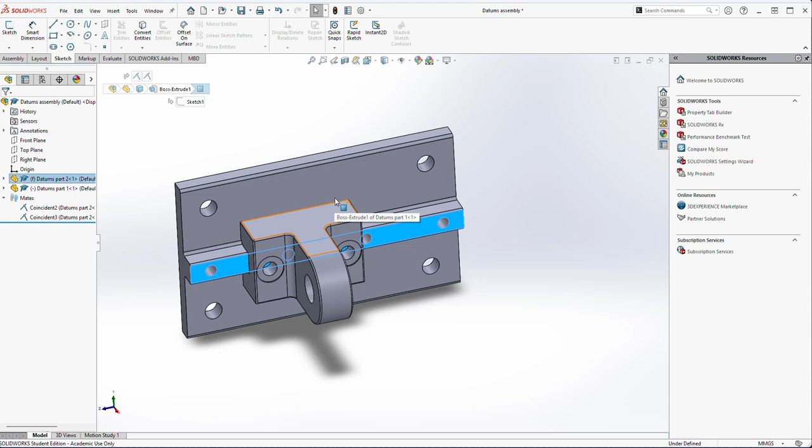If we have a look at the way it sits in an assembly, it mounts on a tongue on this plate, and it's got three positions that it can sit in where the holes line up - there, there, or there.

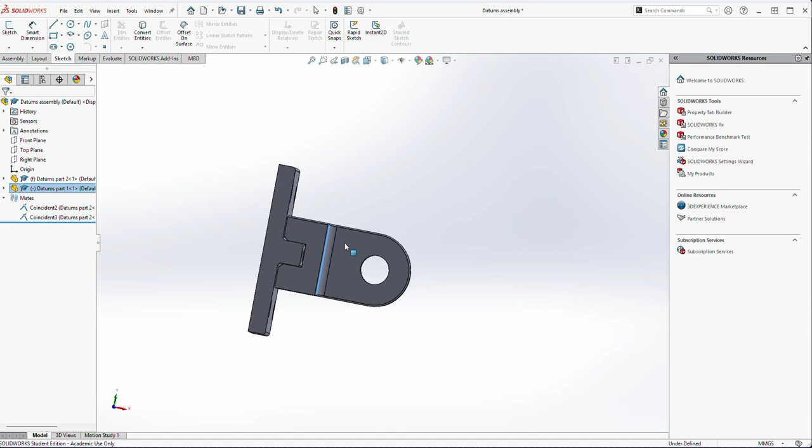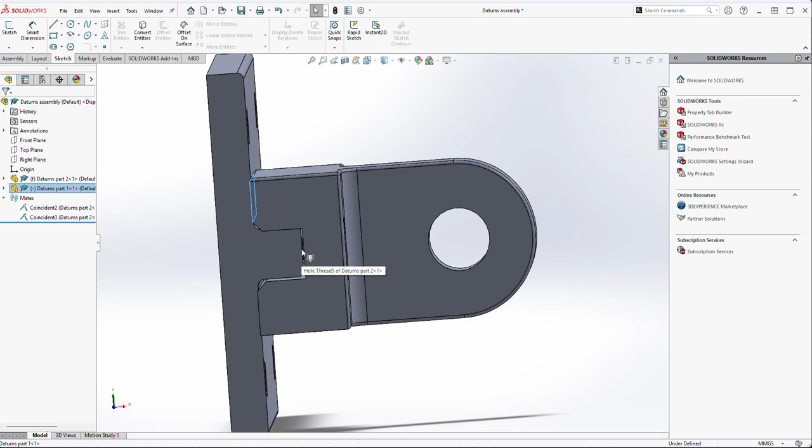If we look at it end on, there's clearance on top of the tongue and the base sits on the plate - I'll just shuffle that along a little bit. You can see that surface there is bearing on the surface of the plate. So when we design this, we don't want any interference here. There must be clearance, it must slide, and it must locate on these mounting points.

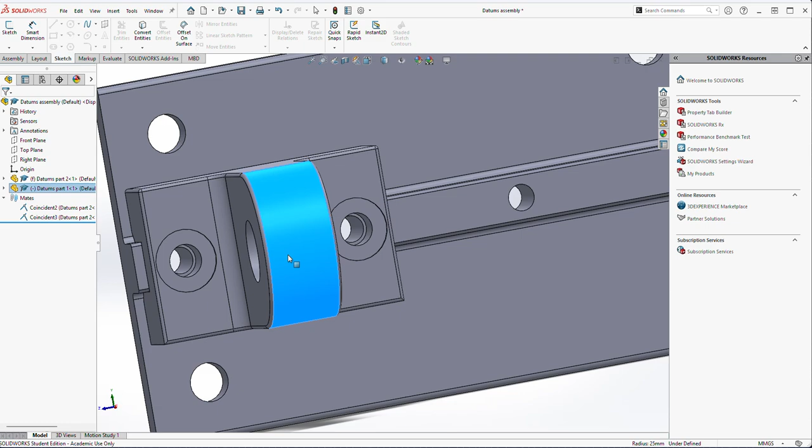The bolt must fit through the clearance hole here, and these are threaded, although they don't look like it, but they are. Whatever mounts on here will have a pin to run through this hole, and that should be probably some sort of sliding fit. So knowing the context of the thing, we can apply some sizes and indicate perhaps some machining tolerances that make the part useful.

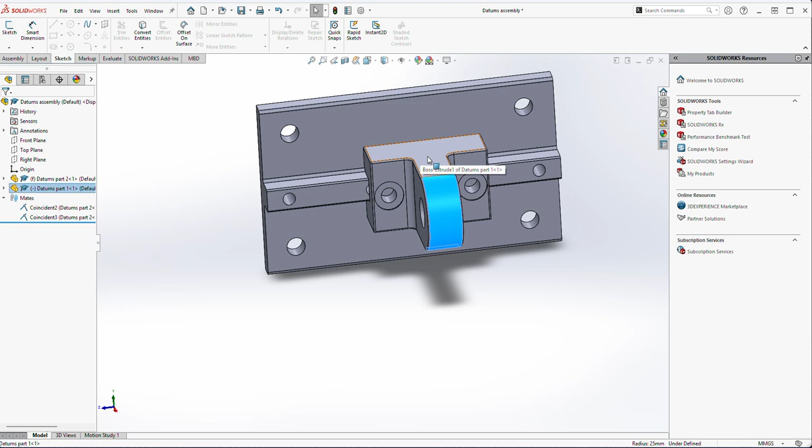The top surface doesn't matter, so a rough overall limit of plus or minus 0.5 would probably be sufficient. It might even be that the bar stock comes this width, whatever this happens to be - we'll find out, possibly not. The key really is not to make the part more expensive than it needs to be, but it must work.

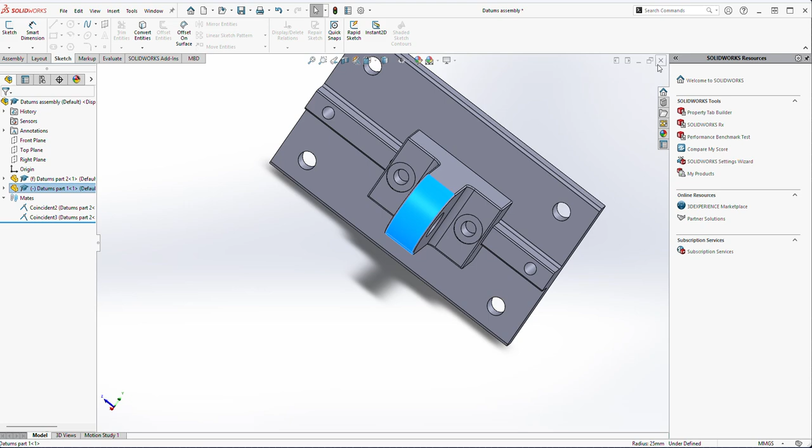So if we close that out and make a drawing from part - I've got a template that I've set up for myself here, which has a few little features we might just run over first. I've put the third angle projection symbol in there as part of the template, and you would do this, or have this done for you, in any business environment, and chances are there would actually be a company logo and company name on the sheet as well.

The other modifications I've made to the title block - there's a bunch of other angular tolerances and so forth I've gotten rid of out of here because they could be added if required. Often just sufficient would be lengths, and I've taken the automatic labels out of here. They're useful if we save our files in a particular way by drawing number, but if we're not doing that, you will have seen on your own initial drawings that this can get a bit messy.

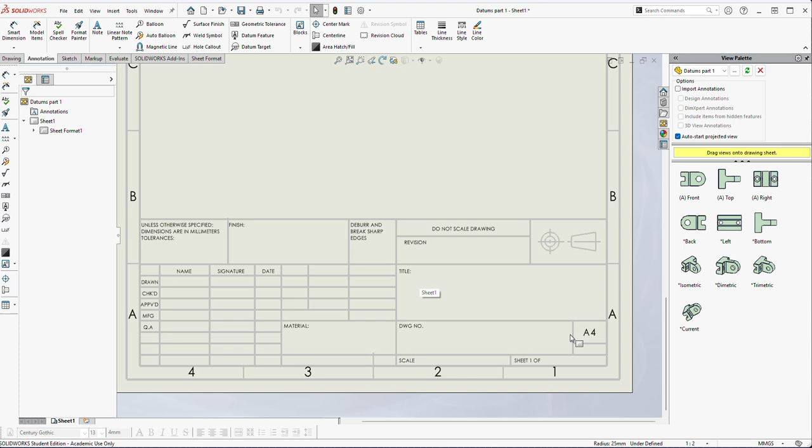I've changed it to sheet 1 of something - we can add a number in there if necessary. What else? That's about it really, but it just makes it a little bit more usable and a little bit less work each time.

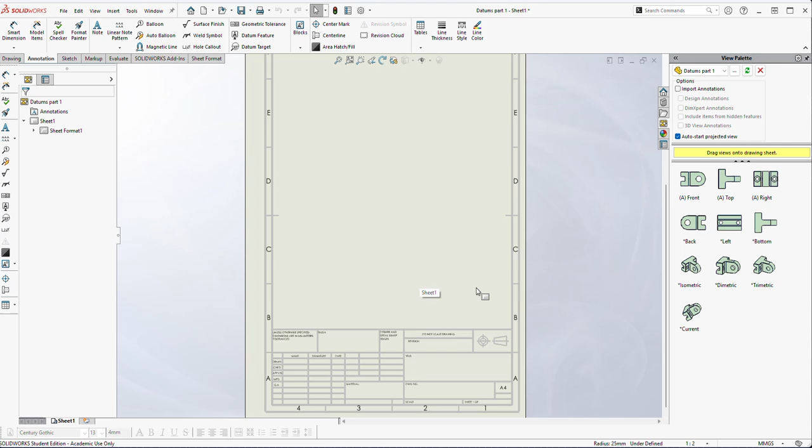I've had a query about this third angle projection symbol, and I think rather than putting it as an item that you can add, it should be always present, because we are always going to be drawing an orthographic drawing in third angle. I guess if this was purely a pictorial drawing, that would have to go, but most of the time we're not working off pictorial drawings.

So if we pick the front view and place that, it'll automatically project our three views. In this case, the part requires three views to show what it is. I don't think we need a fourth view other than our standard sort of pictorial that we tend to have on these drawings, because it's easy to do.

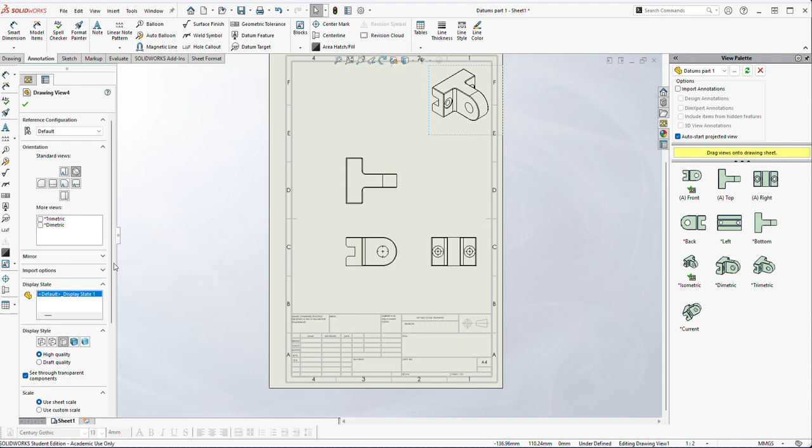Make that more solid, and that's fine sitting up there, and it leaves us sufficient room. I just might move these around a little bit, make use of the space that's available to us. Might have to shuffle these later on once there's some dimensions in place.

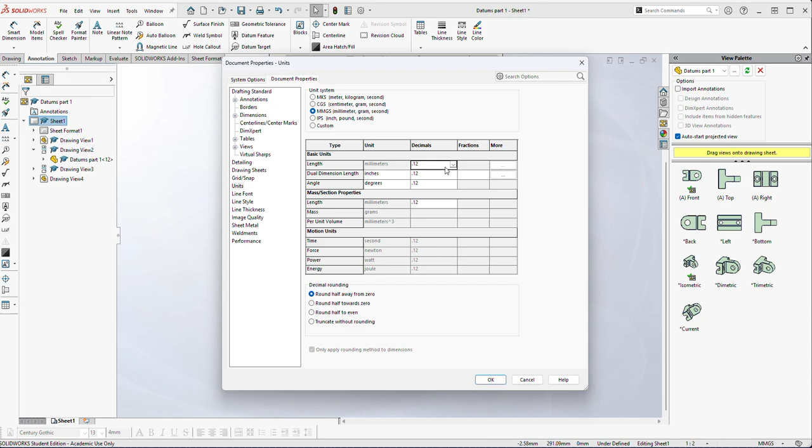So what I'm going to do initially is set the way that SolidWorks displays the dimensions to having no decimal places, because that will be quicker given that there's quite a few dimensions on this that don't matter too much. So if I just go into my tools and options - there's a few places to get to this - document properties, units, and we'll drop that down to none.

That means that for the overall general sizes we won't have to adjust them. We will have to adjust the initial dimensions we put on, because those are the ones we deem to be important. So focusing in on where there's two critical areas in this part - it's possible that the distance from the centre of this bore to the surface is important, and if it was, we would use that face as a datum.

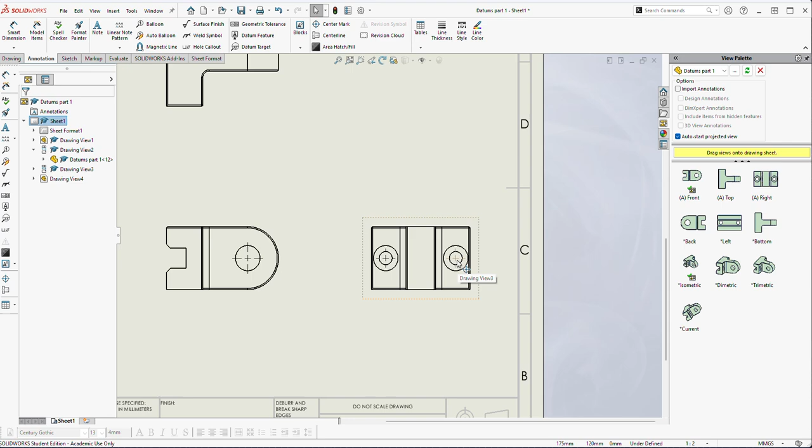For the holes, probably the datum would be a centre line off of the part, but the critical thing is the spacing of the holes. So that's what we need to indicate on our drawing. Initially we'll put a centre line on here just by clicking the two surfaces, and then I might actually crack on and put another one on here.

Yep, and say that's sufficient. Now we'll dimension these two holes, and I'm going to say that it doesn't matter where they are in respect to the outside boundaries of the part or outside surfaces. The centre line indicates that they should be on centre, and we're going to add some general tolerancing in a minute to set that as a tolerance.

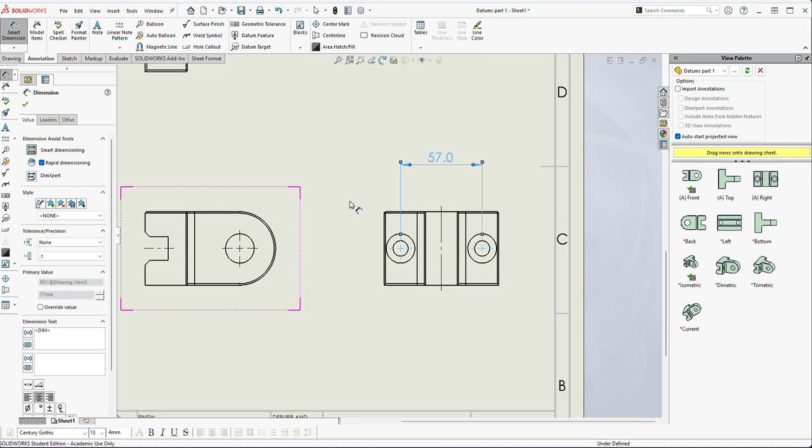So this dimension here needs to be more accurate than just an overall, so we'll give it one decimal place, and what that means at the moment is nothing, but what we can make it mean is we'll put a general tolerance for the drawing. So we'll add a note in here, and say 0 is plus or minus,

and that plus or minus sign you can put in by going Alt and then 0177. There's a lot of Unicode that you can add using the Alt key, and if you have a look on Google you'll find the various different options.

So we'll say that if there's no decimal places, well then we'll make it plus or minus 0.5, and then if there's one decimal place, we'll make that 0.2. And if there's two decimal places, make it 0.05.

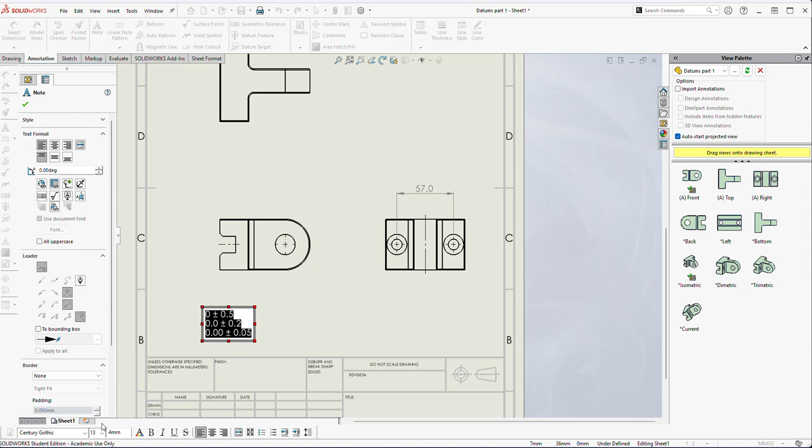Now these are all a little bit big in terms of fitting them into this little box down here, so we'll just escape out of there, and we'll change the font down here to 8 point, and then that will shuffle in quite nicely down there.

So for this drawing we're indicating 0.5 millimeter, or it can also apply to the angles in terms of degrees as well. Okay, so we've got a size on here as well, so those bolts have to go through the hole.

So if we go back to Smart Dimension, we need to adjust that a little bit, and we'll change that to 10.5, and with one decimal place that would be 10.7 down to 10.3. A 10 mil bolt's going to fit in a 10.3 hole, so that should be okay, and the combination of that with the spacing should still ensure that we get alignment when the two parts fit together.

So you've got to consider all the permutations of your dimensions. So the other part that's important with this is this slot. This is where this fits. Well, there's three actually, but we'll look at the slot first. So we'll dimension the width of the slot.

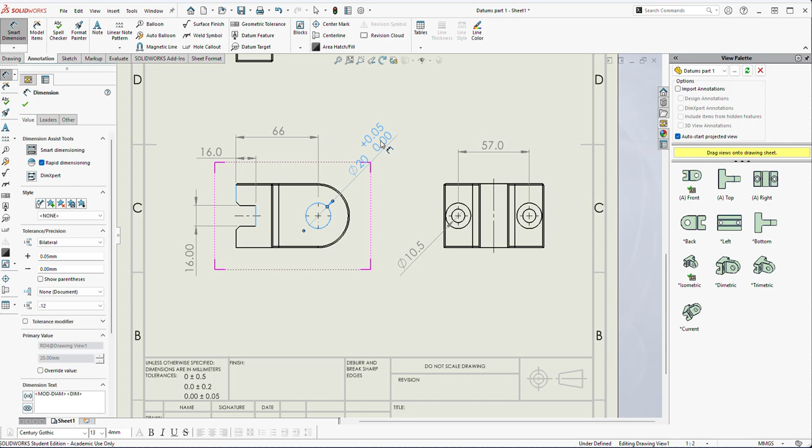Where's Mousey gone? There he is. Right, so we need to change the display so that it allows that to be visible.

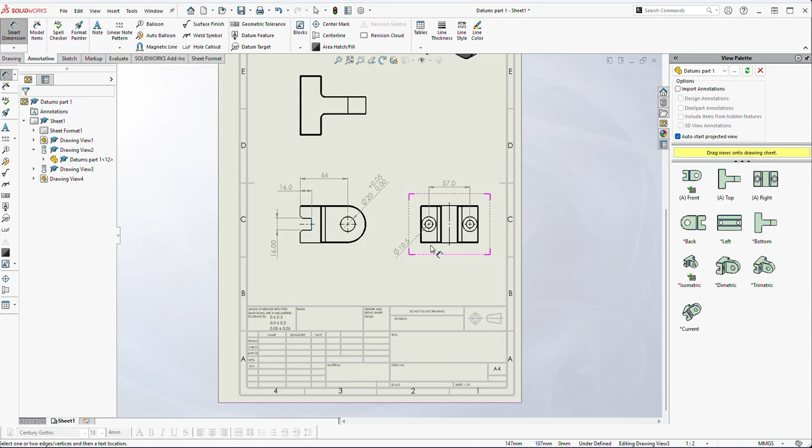So is there anything else on here that's important? Probably not. I think that those are all our critical dimensions. So we can now get on and balance the rest of the dimensions around the part. So that's one we need.

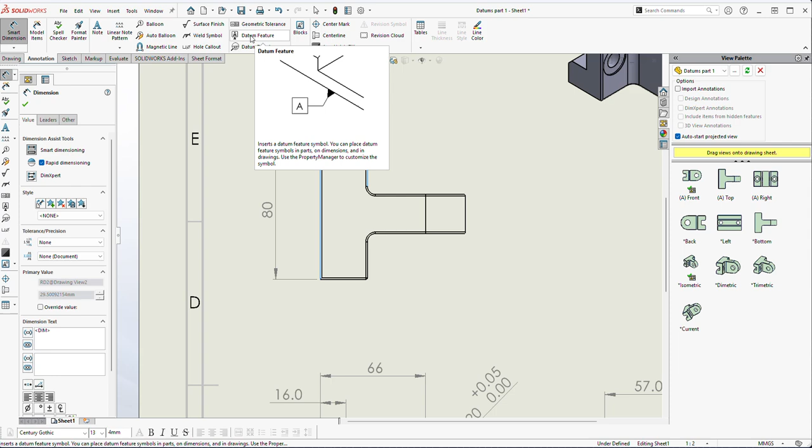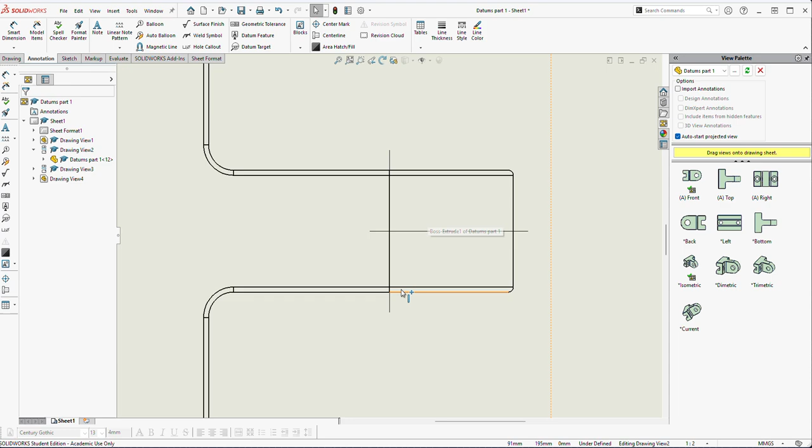If we put a center line on here, what's happening here? Then putting a width on there indicates that that is on center. So we'll do that. Oh, I ended up with a center line down through there as well. Doesn't really matter, it's not really that visible because we've got the intersection line of the radius as well. So yeah, I think we'll just leave it like that.

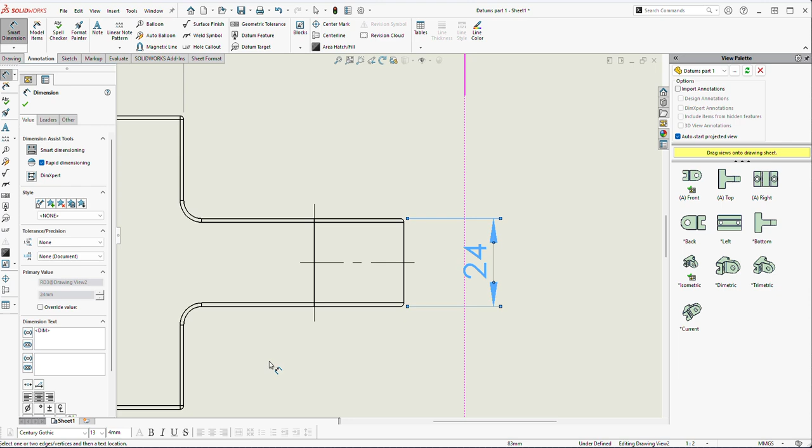So dimension the width. This has got quite a radius all running around it, so it's quite tricky to make sure that I grab the right points, and we've got a radius here, and probably the easiest way to pick this one is off the corner.

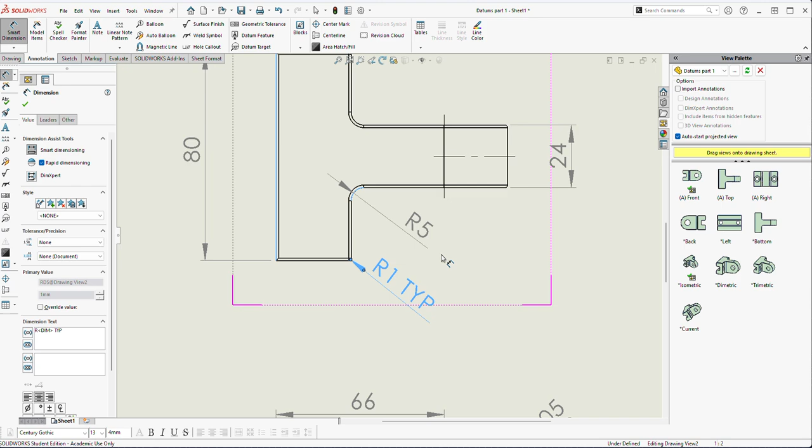So that's just like a chamfer all around, just a radial chamfer all the way around the product, just to make it smooth. It's effectively taking the sharp edges off, but in a bigger way. And because this is everywhere, we'll just edit that and we'll say typical. We could put R5 two places here, but it's pretty obvious that if that's R5 and that's not dimensioned, it must also be an R5. So yeah, I think that's sufficient.

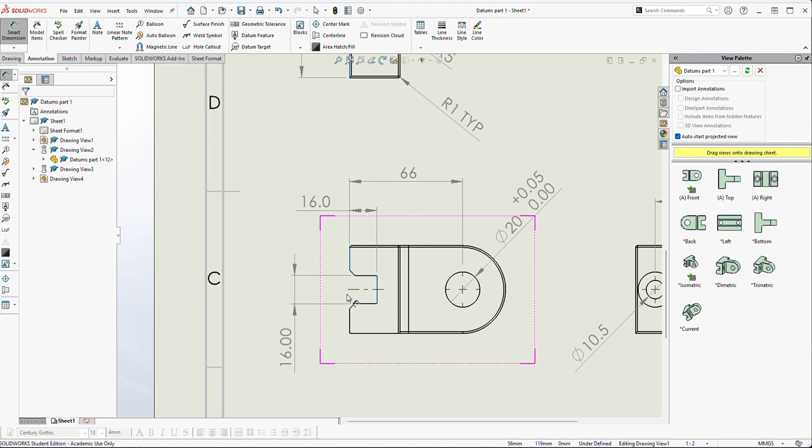And then we've got the detail around this slot that we need to manage. So, 4mm. I'm going to have to rearrange things a little bit here because things are going to get too busy.

Because we need to indicate the width of that chamfer. And that chamfer is actually, it's not important that that is 4mm because 3.5 will probably do. It's a 3mm radius on the tongue, and you wouldn't want that to conflict. But when I made the parts, I thought about that and made it somewhat generous. That could be 5mm and it would still be quite effective. So where you don't have to put a tolerance on, where an open size will fit, I've said it before, but it's good practice to make things as cheap to produce as possible.

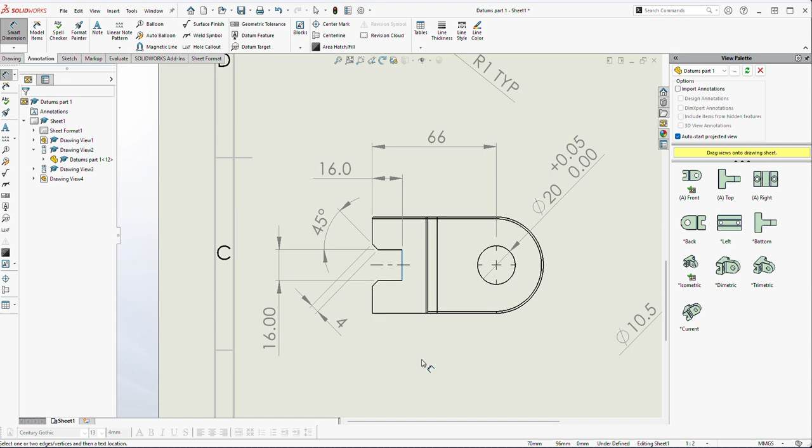Okay, we've got our 4mm and 45 degrees in there. That's probably sufficient.

Put a dimension on that radius. And that radius indicates the width, because if that's an R25, this must be 50mm across, so there's no need to add the 50mm dimension. So we're fairly close to being finished.

Just one more thing that's required. So we've got a counterbore here, and we can say diameter 20 and times 1 deep, and it's getting a bit long.

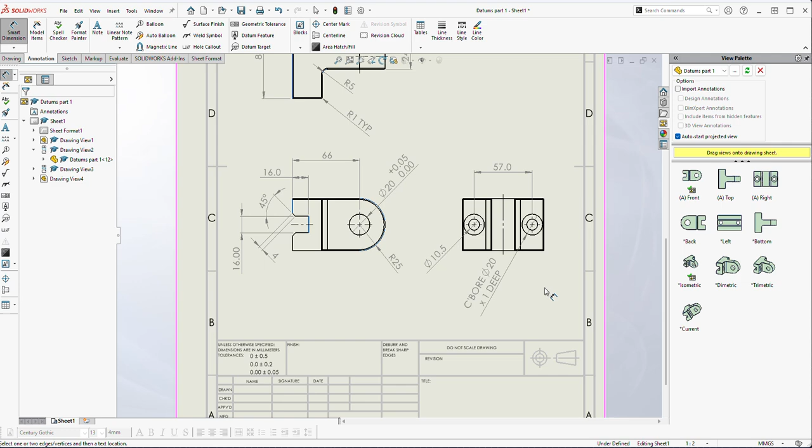Okay, I think that's fully dimensioned. I don't like that centre line on there, but no, it's sort of correct, so maybe we'll leave it there.

Alright, so just to make things somewhat realistic, we should really give it a title. So we'll call it Clevis Mount. And revision 1. And machine all over.

Most drawings have a number. I'm going to quit out of that for a moment, tidy that up. Tidy that up.

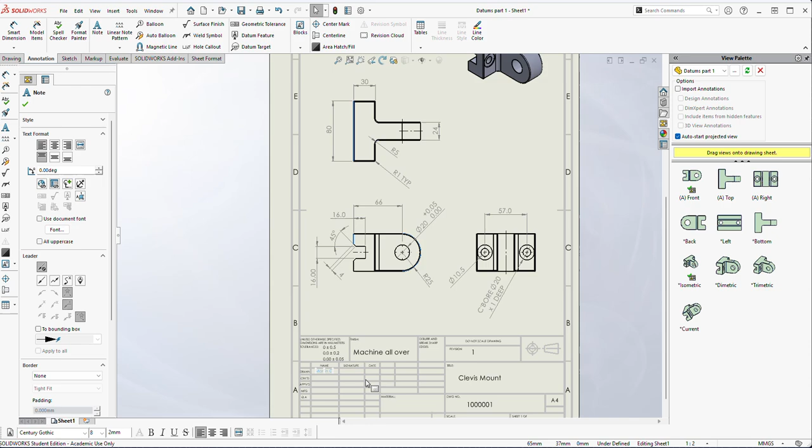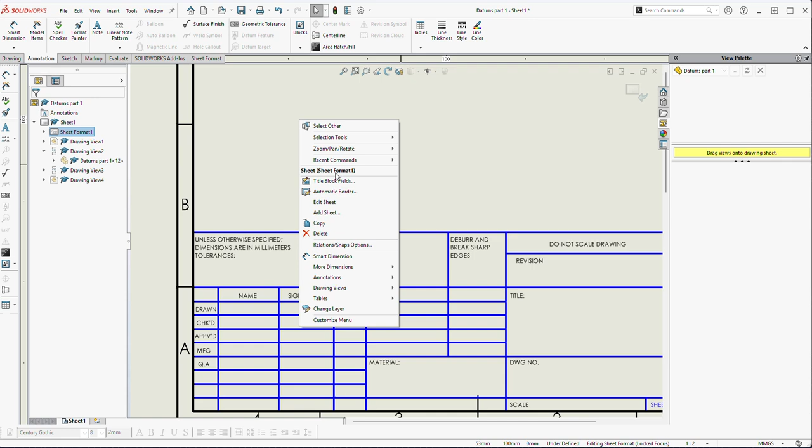And my little title block here is not too useful because fitting a date in there is going to be pretty impossible. So if we go edit sheet format, no. I think that's probably a superfluous line, so we'll get rid of that. And add note.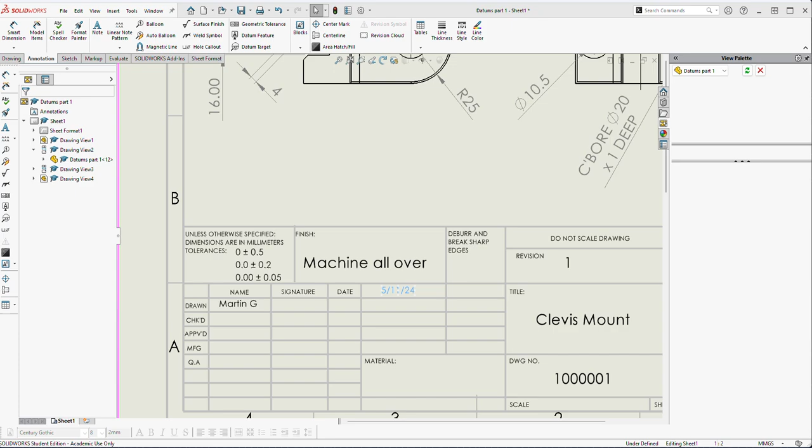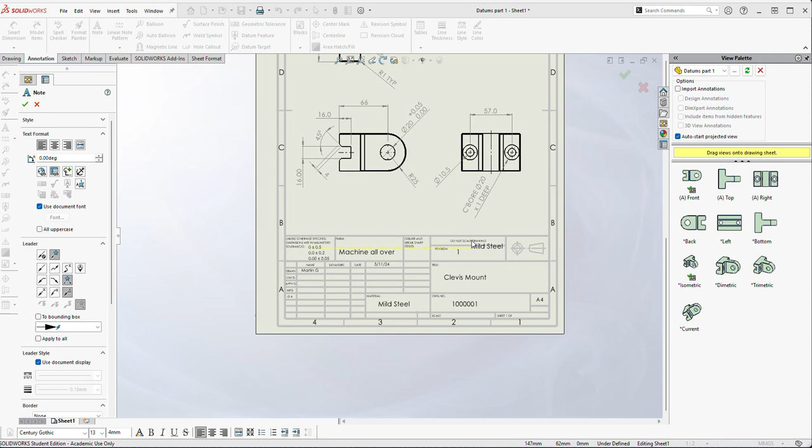Okay, I think we can call that finished. Needs to be made out of something, doesn't it? So, okay, that should be sufficient for

this part. So what we've got, just to reiterate, we've got a 57mm set of centres for two 10.5mm holes. They're quite important, they're on a centre line. In actual fact, probably isn't indicated at this point that those are on a centre, on the centre. So

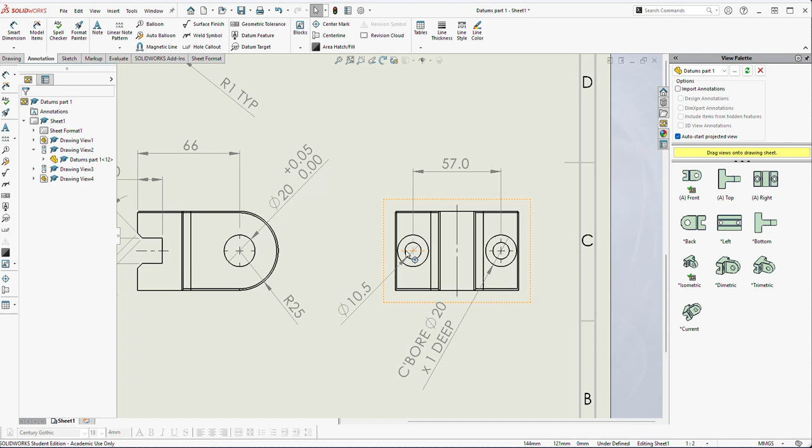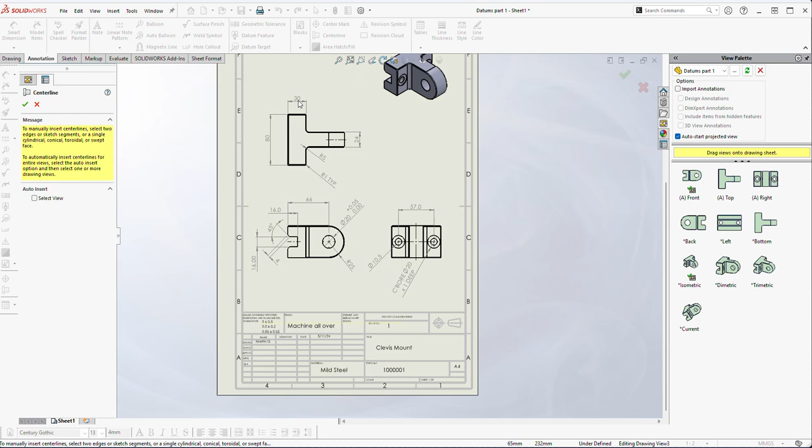probably should put a centre line in that orientation as well. So yep, so now it's pretty clear that those are on centre. So hopefully that's useful. This drawing, I don't think would lose too many marks at marking. It's complete, all the information is there. We could make this part from this, and the dimensioning is from a datum where appropriate. So hopefully that's useful.